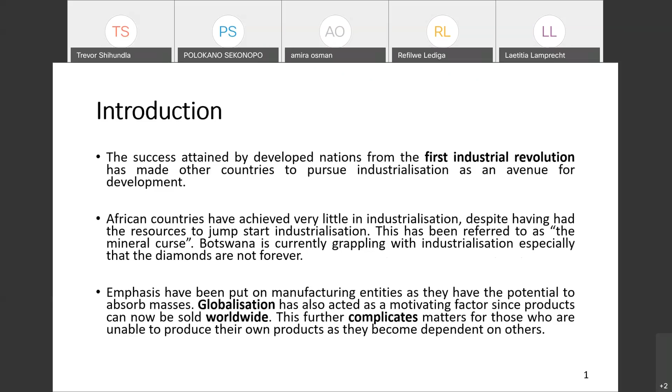Globalization has also acted as a motivating factor, since products produced in one country can be sold in another. Globalization also acts as a double-sided sword, since those countries which are unable to produce for themselves don't have much time to learn, as they tend to rely on products produced in other countries.

The literature that I reviewed has shown that around the whole world, countries are looking for ways of improving the livelihood of their citizens, and job creation is one of those ways.

This is based on the opinion by Holmes and others, who opine that prioritization of employment creation is informed by a prevalent assumption that employment has a positive impact on poverty reduction and stabilization.

This has led governments, in a bid to create entities which will create employment for their citizens, to devise means of empowering their SMEs with the hope that such assistance can help in the creation of jobs. Such assistance is in the form of grants, subsidies, mentoring, factory shells, and so many other interventions.

These interventions mostly target small, micro, and medium enterprises, our SMEs. This is because they contribute a lot to job creation and income generation. The downside is that though SMEs contribute a considerable number of jobs, they are characterized by a high failure rate. There are many advantages of focusing on SMEs because SMEs are the highest employers.

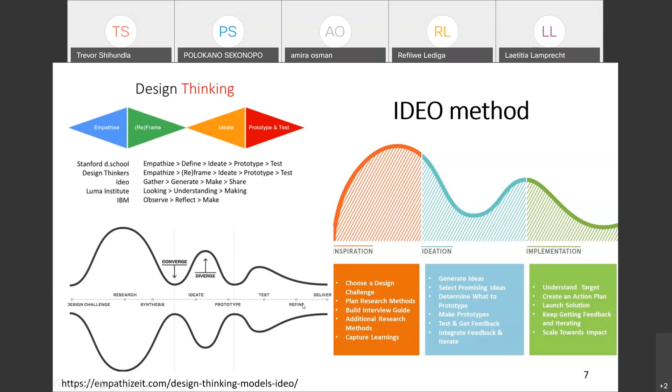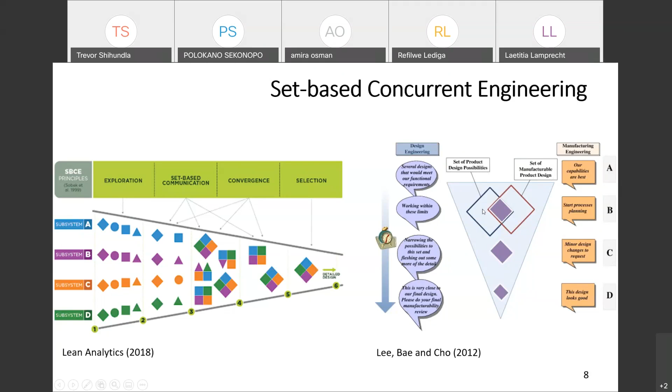The methodology adopted for this study was qualitative, involving the use of interviews, observations, and workshops, and a small percentage of quantitative method—a survey—was employed to identify entities to be taken up for the qualitative study.

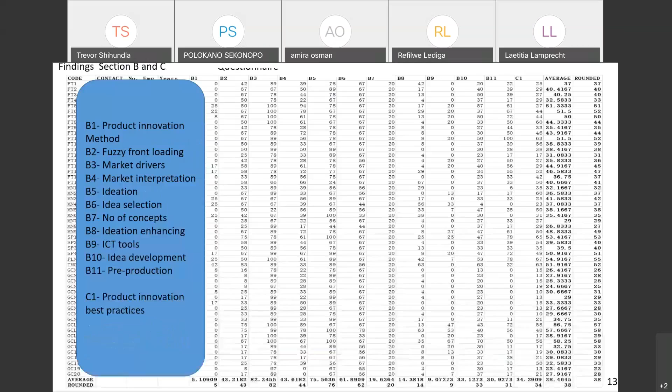Now, when you look at the years of operation, companies with less than 5 years number 32. Those which are 5 to 10 years are just 10. 11 to 15 years: 5. 16 and above: this is a really unpalatable situation, in that 1 to 4 years has been regarded as a very volatile time period for a startup company, because the company is not yet grounded in the intricacies of business. Here are the findings of Section B and Section C.

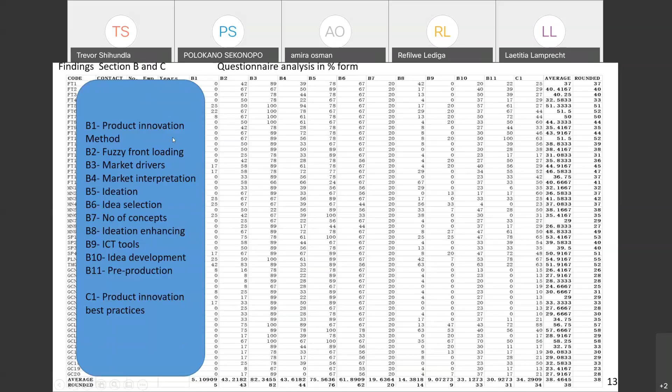Okay, this is the product innovation model. We just wanted to check the product innovation model Botswana SMEs are using. And the score, there's just so many zeros for these different companies, which means they don't have a product innovation model. Not having a product innovation model is like a team playing football without a system, which is very dangerous.

So from the interview findings, it just confirmed what the questionnaire found, and most participants did not have formal knowledge about product innovation. They had not got formal innovation certification.

At observation, I had wanted to use the so-called rapid plant assessment form, which is used by Japanese companies when they go around the world looking for companies to buy or take over. But when I tried to use it in Botswana, I found it could not be used because Botswana's product innovation scenario is completely far away from that, though we are trying to move towards it.

In conclusion, it has been found that Botswana SMEs are not providing enough jobs. Botswana's SMEs have got a high product innovation apathy, and there's a need for a product innovation model to be developed for Botswana. Also, the government of Botswana should devise programs to reach the general public concerning entrepreneurship and product innovation, because by doing so, consumers would want better products, thus making the SMEs come up with better products.

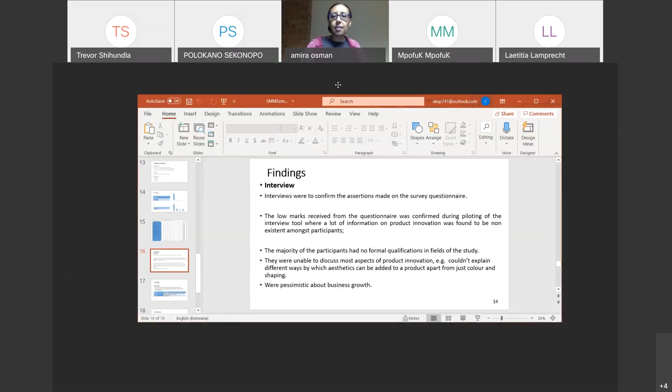Polokano, could you tell us a little bit more about this school program? I'm just fascinated by that. So your research is identifying problems with SMMEs, and there isn't enough product innovation, and you've identified that as the missing link with regards to development. I appreciate your comment about diamonds are not forever, and the fact that we need to develop new products. Is there an awareness about that? Is that why this program is taught in schools? Because I thought that's quite advanced. Could you perhaps comment on that before we move on to Laetitia?

Yeah, actually, it is taught in schools. The government decided to teach it in schools with the hope that the students, when they graduate from this program... it is called design and technology.

Okay, very interesting. But that, I mean, that in itself is a great advancement in terms of awareness of what the problems are. Do you agree with me? Yes, I do. Yeah, that's incredible. So thank you so much.

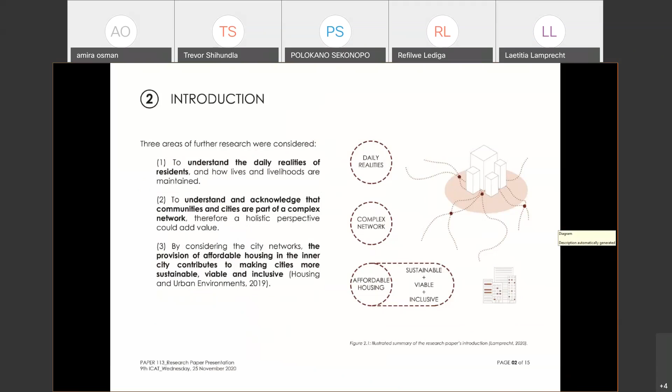So within this context, the word community refers to the community occupied building in the city of Johannesburg and the various interactions.

Laetitia, we're not hearing you anymore. Your voice is gone. Laetitia, we can't hear you at all. Can you hear us? You can type something in the chat. Trevor, do you have any idea what we can do? I'm just trying to text her to see if she will respond.

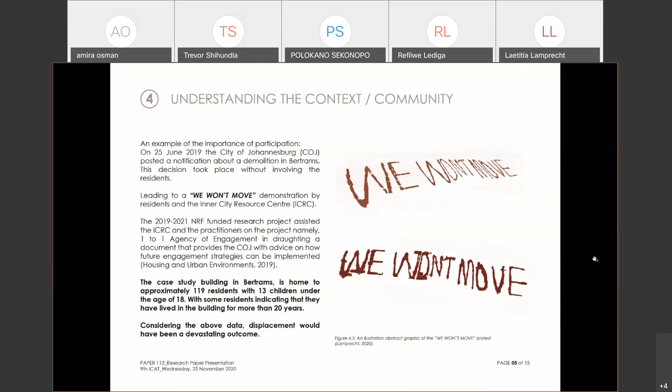If you consider that there are over 119 residents with 13 children under the age of 18, with some residents indicating that they have lived in the building for more than 20 years, this displacement would have been devastating.

Moving on to the action that was taken: the action plan was developed by TUT Architecture, CARINBE, and the UJ Community Engagement Team. This collaboration allowed engineers, contractors, and architects to come together and provide a list of what needs immediate attention within the building.

Firstly, the structural damage to the roof was identified. Secondly, design challenges needed for safety were identified. During this process of renovation, it was very noteworthy to see how solutions were found within the moment, and these types of solutions only take place when residents remain involved in the project and the process.

So the response was to repair the bricks, balcony, and also the steel staircase, allowing for general safety repairs. After that, a new screed layer was installed on the roof with a waterproof barrier. This now not only improved the structural safety, but also improved the living conditions.

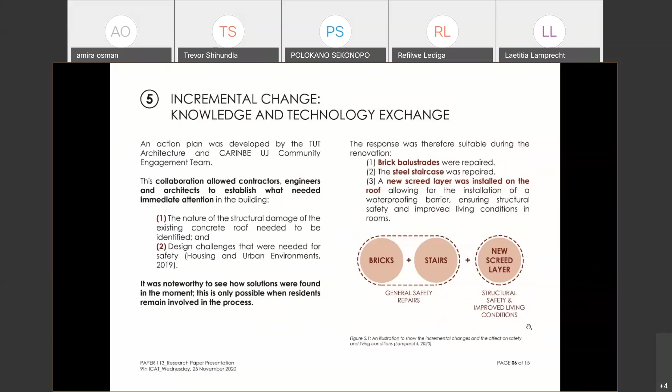So what does this tell us? The systemic change that needs to happen within architecture education — this is where the academic reflections help us. Understanding that architecture is not static is the first thing, and that radical shifts are required in the form of a response to dynamic societies in authentic ways.

We often think of radical shifts as being these grand ideas, however it's oftentimes small responses that make the greatest change. So asking a fundamental question which community engagement projects allow researchers to ask: how can architecture make a meaningful impact? By understanding and shifting the perspective towards the needs of the user and society, this idea of radical change does not seem daunting, but merely necessary.

So what is required? Balance is required to consider both human relationships that support community, with technical knowledge and advancing technology at the same time. However, this needs to be in balance in order to create these supports so that multifunctional cities can develop.

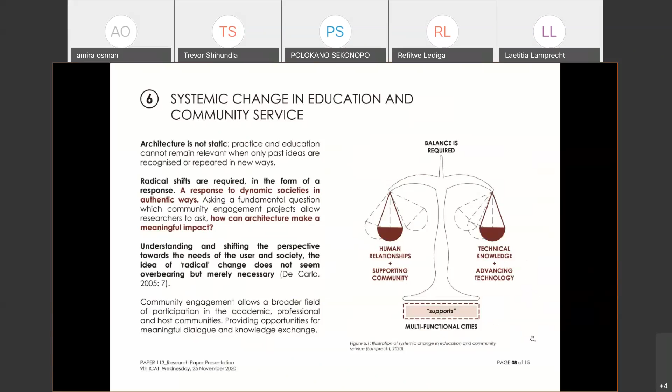So the implications of higher level policies and communities: firstly, architecture education and practice need to become responsive, and also local policies need to become more responsive.

By engaging with research institutions and being updated by changes in communities, policies could become more responsive. Cities need to be adapted for diversity, so participation not only becomes possible, but necessary. Considering the past displacement that occurred in Bertrams, it became clear that further disruption of place and livelihoods cannot be a solution. So to provide an example, policies that are interrelated yet accommodating.

The impact of the interventions, observing change: during the process of renovation, with the building's waterproofing, we asked this question - would this encourage you to start cleaning and fixing the spaces? We posed this to the residents, and many responded with the fact that they would start fixing and painting the rooms themselves.

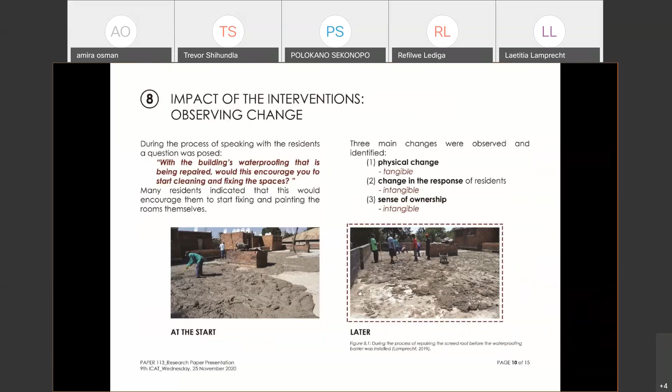This change indicates how architectural academia and practice can develop and remain relevant, but need to be open to change and accept social responsibility. All of these ideas need to come together, and that is the only way architecture will ultimately remain relevant.

So in Nabeel Hamdi's Small Change, Colin Ward references John Turner's first law of housing, which is specifically relevant here too. I'll just read the quote: when dwellers control the major decisions and are free to make their own contribution to the design, construction, or management of their housing, both the process and the environment produced stimulate individual and social well-being.

In conclusion, through the various workshops, meetings, and skills training that took place, these were all based on the needs of the host community. The project ultimately successfully brought together stakeholders and participants. Realizing the academic benefits, the research also ensured inclusivity in design making and implementation. Secondly, this is in some respects an alternative approach towards housing provision, retaining existing communities and minimizing displacement.

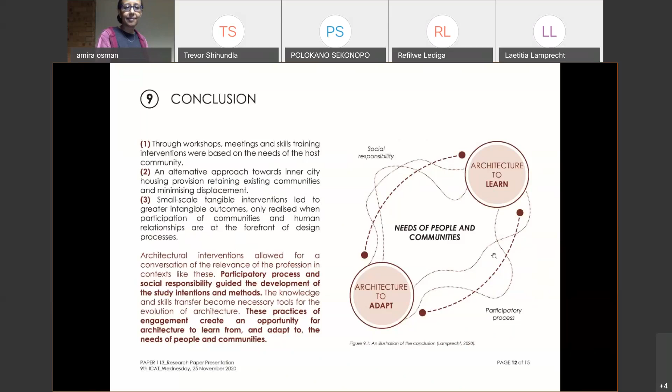I would like to ask my co-author, Professor Amira Osman, if she would like to add any of her own thoughts and reflections.

Thank you so much, Laetitia. I was about to interrupt you, but I gave you an extra minute, so that is very fine.

I want to consult here with, before I make comment on this, I want to consult with Refilwe, and I see that Dr. Mahachi has joined us as well. Is it okay if I switch the program a bit, Refilwe and Dr. Mahachi? It's just that we have another paper that's strongly linked to this one, so I thought it might make sense to present that paper immediately after this one, and then come to your presentation after that. But I'll only do that if it's acceptable to you. Dr. Mahachi, could we hear your comment on that, please?

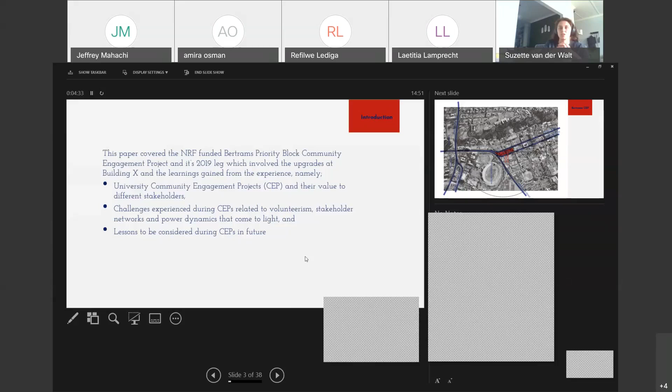So firstly, and I don't have to do too much context here, Bertrams is located east of Johannesburg CBD. It's located just east of Ellis Park.

Bertrams was developed in the 1930s as middle income housing for working communities associated with the mining industry in Johannesburg. Over the years it's undergone a series of transformations, and it was actually considered one of the first suburban areas that was an integrated community in the late 80s, around the time Hillbrow was also becoming quite cosmopolitan, before the abolishment of the Group Areas Act. Because it's on the periphery of the city, it has remained out of the spotlight, so things happen there without anybody knowing.

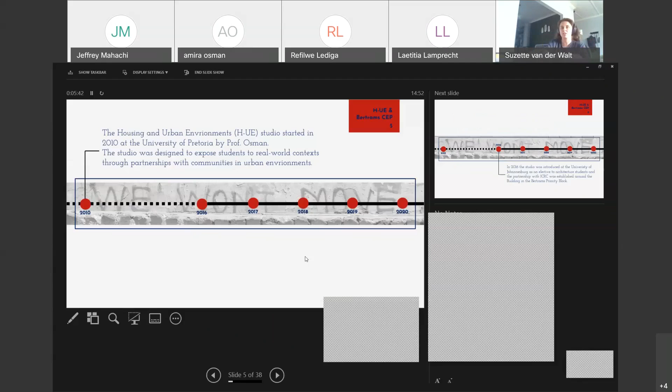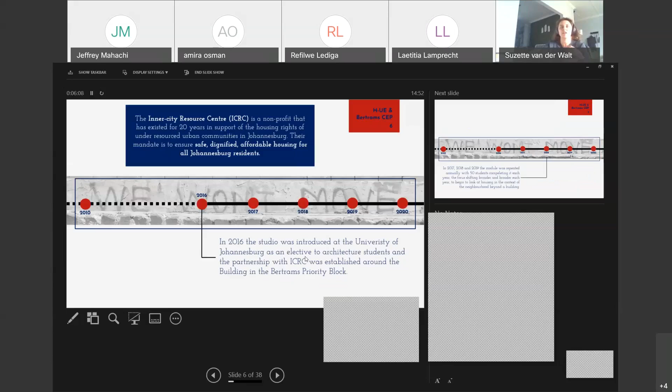Just an introduction to the project: the Housing and Urban Environment Studio started in 2010 at the University of Pretoria by Prof. Osman, and it's been through a series of iterations, resident at a number of universities. In 2016 it was moved to the University of Johannesburg, where it became an elective for architecture students. The elective was hoping to look at urban environments, and that's why they reached out to the Inner City Resource Centre, a non-profit operating in Johannesburg for 20 years that represents the needs of under-resourced urban communities in their plight for safe, dignified, and affordable housing. From 2017 to 2019, the studio was run every year at UJ with up to 50 students completing it, and every year the focus became broader, going from housing on a building scale to a city or neighborhood scale.

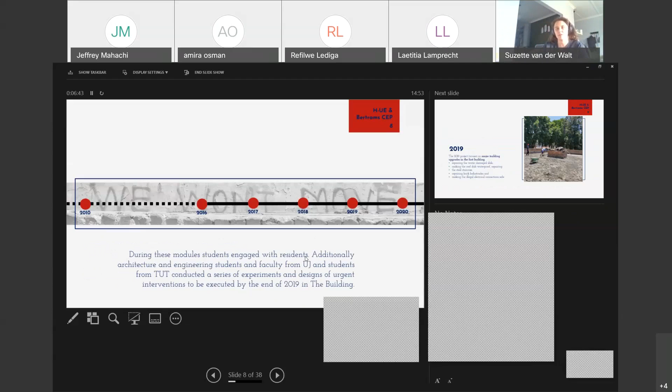During these modules, students engaged with residents to develop ideas and analyze the big challenges, and we looked at one building in particular. In 2019, when I joined the project, my role was to implement upgrades based on the recommendations the students had made. These major upgrades included repairing the slab, making it waterproof, fixing the steel staircase, repairing brick balustrades, and fixing the illegal electrical connections, which Laetitia has already shared with you.

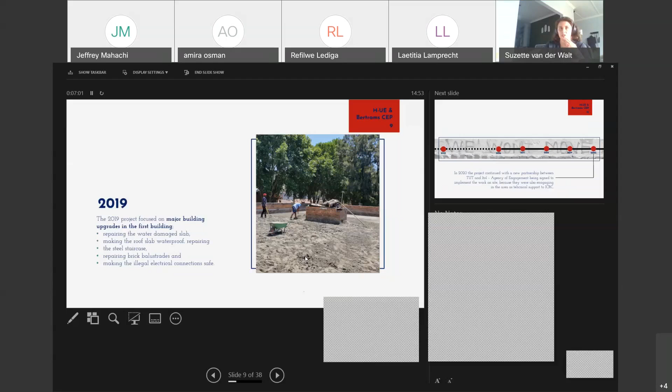Now we're in 2020 and the project is ongoing until 2021. This year we've formalized the agreement between 1to1 and the organization I represent, and we're taking these upgrades further. In 2020, the project has started looking at the neighborhood and specifically hopes to address COVID-19 exacerbated issues, looking at spatial interventions at the neighborhood scale with a series of workshops with representatives from the community.

The advantage of community engagement projects at universities is exposure to a real world context, which is invaluable for students. It also fosters a sense of sensitivity towards other environments. Students often occupy a position of privilege and move through cities every day without knowing what happens in those cities; by doing this, they start opening their eyes to what is happening in the rest of the world. Additionally, these community engagement projects allow us to channel resources that, as learning resources, would typically never leave the campus - we're bringing those into the city where they can contribute more. The last benefit is that it allows academics, lecturers and researchers, to remain present in their profession, something they often lose track of.

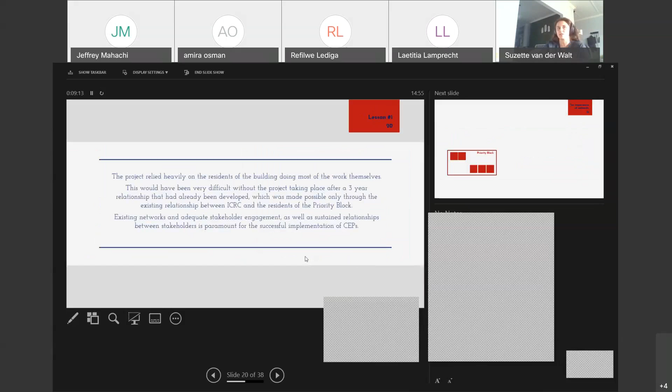We relied very heavily on resident engagement, and this is problematic as an outsider entering these spaces, so it was important to understand the relationships between people and things. The priority block is constantly challenging the City of Joburg for safe and inclusive housing, and they do this through their mobilization by ICRC. ICRC was then contacted by the Housing and Urban Environment Studio, which hoped to get learning in exchange for resources. These resources came through the National Research Foundation, and 1to1 became the implementing agent. But essentially, this relationship between ICRC and the priority block was critical.

So the role of this relationship was invaluable, and it allowed us to really get buy-in from the residents. It was important to use ICRC as a channel to introduce new team members, to establish those relationships of trust. It was also important to understand the social dynamics within the building and to prioritize tasks that promoted those relationships and encouraged user participation in as many events as possible, to ensure that buy-in remained and good relationships were maintained for future tasks that might not involve so many residents.

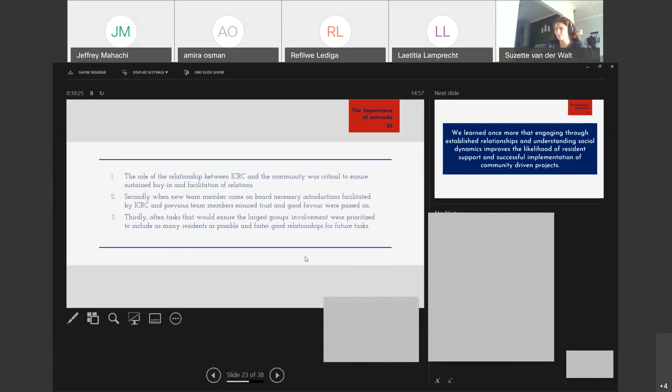So we learned that engaging through these established relationships and understanding the social dynamics improved the likelihood of resident support. This sounds quite obvious, but you only learn this lesson by making this mistake, really.

So self-help is the mandate of ICRC and a number of grassroots organizations, and a number of residents of the priority block are unemployed. It therefore seemed quite obvious to us that we should use a skills training initiative to put the residents to work in repairing their own building.

We believed that to maximize the resources, we would offer an honorarium to the volunteers to thank them for their time and participation. We thought it only fair. However, this brought about tremendous challenges and learnings and some conflict along the way. As soon as you start issuing payment for something, then you're setting up a different set of priorities and values.

Additionally, the idea of skills training is a very politicized idea, and we often see it as a tool for economic redress. However, the idea that I, as an architect or as an academic, have anything to teach somebody who probably has been doing the work I'm trying to make them do for much longer than I have been on the planet, is quite an arrogant thing to do.

So from the experience of being on the ground, it actually brought us to question whether people are not employed because they don't necessarily possess the skills, but because they don't have access to the opportunities to put their skills to use.

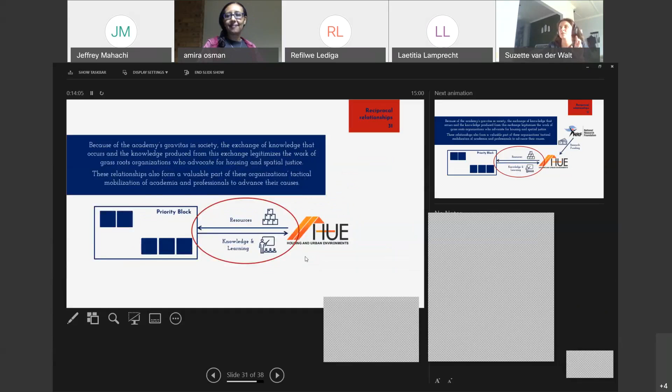Okay, I'm on it. So this relationship and this exchange is incredibly valuable because we can channel these resources to where they are most wanted. These are just some key takeaways that are in the paper, and you can go through them. But I think the major experience is that learning from the real world is incredibly important, though we must understand these are real people and real environments, and we must be incredibly careful.

So then just quickly, updates on the project: it has since seen us get new researchers as part of the team, which has been quite great. And our project now focuses on water and sanitation in the area.

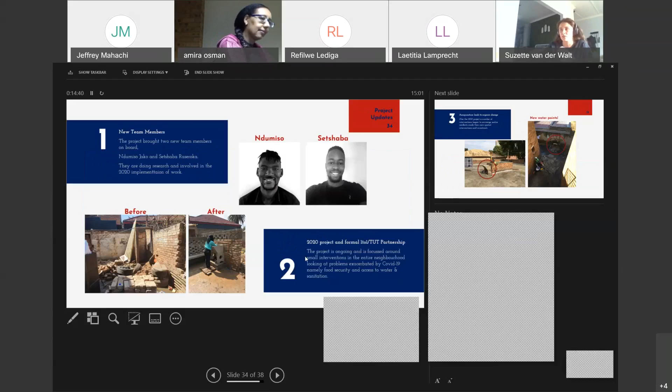So we've been working in some neighboring buildings. We actually built some toilets for one of the buildings that had no access to toilets previously. And then there were these natural developments that occurred in the building where residents had started, after we had repaired the roof and had started doing other things, they started addressing their own needs, particularly in terms of water and access to water.

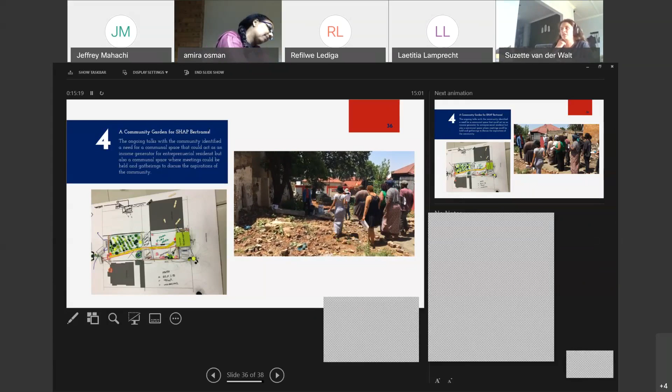And then lastly, the current project we're busy with is looking at the neighborhood, because we established a need for a community space where community issues could be addressed. This is us having designed this park with the residents and then presenting the park as feedback. So the task team is sharing what they had designed by physically mapping out the design in the space, and the rest of the community then seeing what's coming. And we've actually started implementing that now.

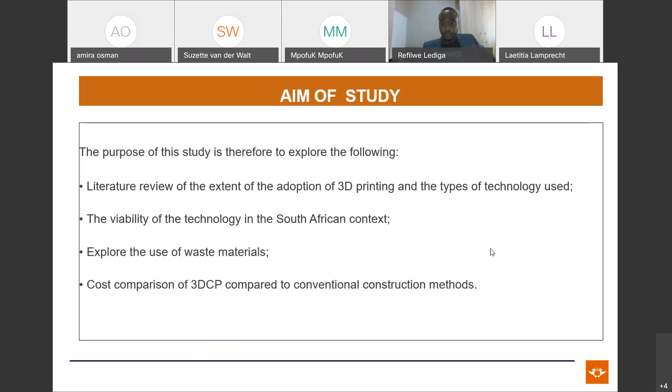Although 3D concrete printing is a relatively young technology, there's substantial research that has been done throughout the world. There are two fundamental factors to take into account to make it successful: one important factor is the 3D concrete printing machine, and the other is the material design. There are also other design approaches to 3D concrete printing. The commonly used machine designs are what we call a gantry-based system and a robotic arm system, which I'll show in the following slides.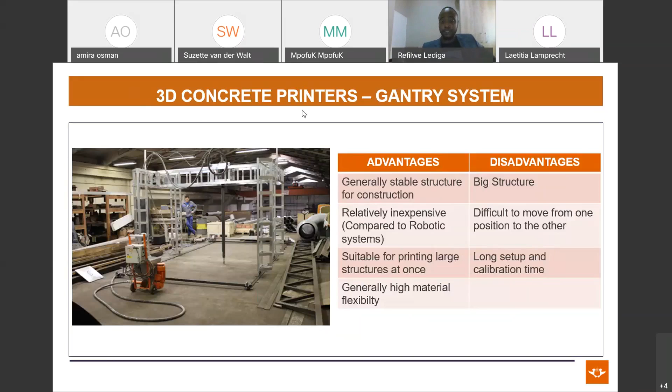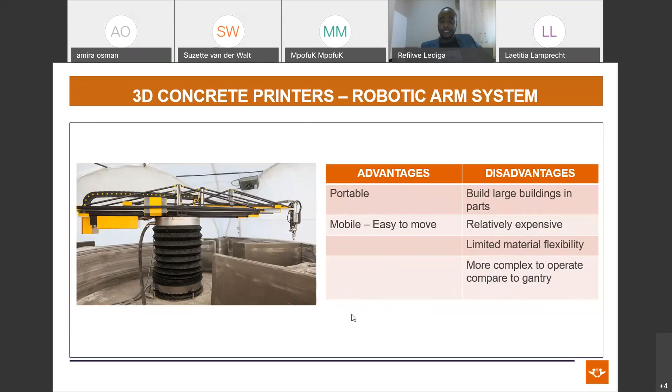Then the next printer I spoke about is the robotic arm system. Its advantage, compared to the gantry system, is that it's a very portable, mobile system. However, the disadvantage is that when building a huge structure, you'd have to build in pieces, similar to Lego pieces. It's relatively expensive, has limited material flexibility with a lot of manufacturers, and is more complex to operate compared to the gantry system.

With regards to the recipe, or the concrete material mix design, what I have on the screen is the fundamental mix design that's used in industry. However, there are various mix designs out there, but they always bear reference to this fundamental mix.

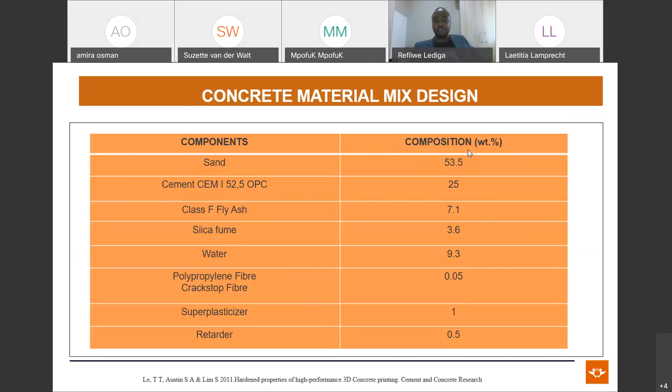We also explored recycled materials in this project. We looked at copper tailings, which showed high mechanical properties in our mix design, good buildability, and are generally abundant in industry. We also looked at recycled glass, which gave us good workability, however lower mechanical properties compared to sand in our material mix. We are still investigating the impact of construction waste and oil sludge.

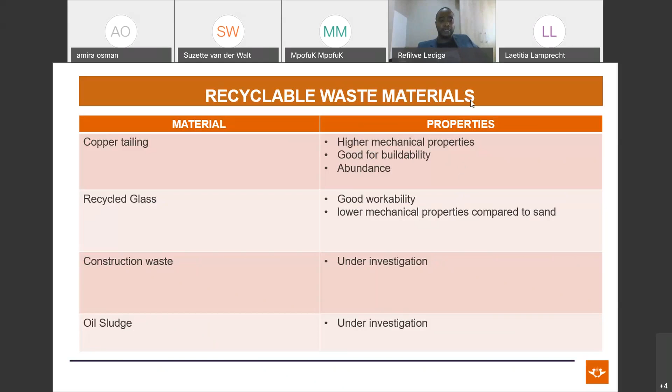In the experimental program and method, the first phase focused on the availability of 3D concrete printers and their categories. The second phase looked at the cost of these printers. The third looked at the materials approach. The fourth compared the labor cost. And finally, we compared all the technologies in one slide.

To do a cost comparison, we had to pick a house. So we chose a typical RDP house, or something that looked like one, with a 40 square meter floor area, 1 bedroom, a bathroom, a living area, a kitchenette, a wall height of 2.4 meters, wall area of 92 square meters, and a wall volume of 12 cubic meters. This is similar to a standard RDP house.

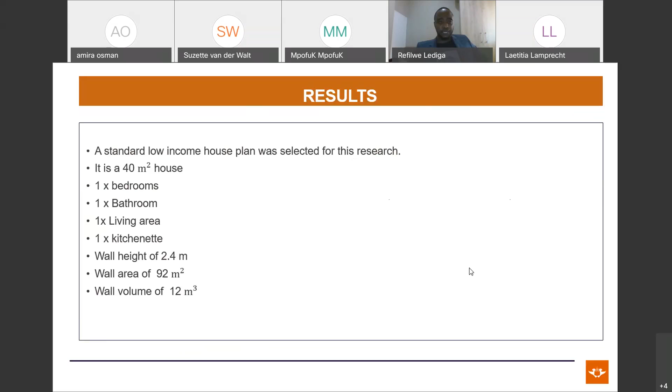After our research, we came to these conclusions, and this is the overall summary of the results that I'll be presenting here today.

With regards to materials, the robotic arm system and the gantry-based system use less material compared to brick and mortar. The reason is the flexibility with regards to printing pattern when using these technologies, which manages to avoid wastage, which we've seen as a big advantage.

With regards to delivery time, between brick and mortar and the robotic arm system, there isn't much difference, but we've seen a lower delivery time with the gantry system.

Now, with the material cost: for brick and mortar, we got 140 rand per square meter. For the robotic arm system, we got 906, which is significantly higher, because robotic arm systems normally use proprietary material. For the gantry system, we got 108 per square meter, because with the gantry system we're able to use the mix similar to the one I referenced when I started my presentation.

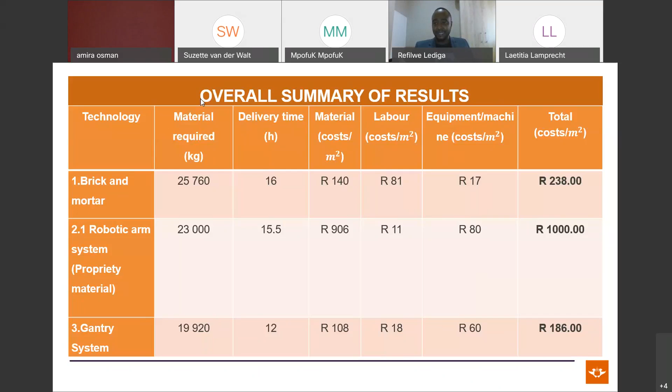Overall, brick and mortar cost 238 rand per square meter, the robotic arm system cost 1,000 rand per square meter mainly due to expensive material, and the gantry system cost 186 rand per square meter, which is not too far off from the brick and mortar system.

So in conclusion, you are concluding, so that's fine. Please proceed, I think I have 9 minutes. I'm on 9 minutes now. So maybe I documented it inaccurately. I thought you were over time.

Please proceed. Okay, so yes, many companies have taken on 3D printing, and it's a growing industry. From the results we show, the cost of machines plays a significant role in the total cost at the end, and they assume that 3D concrete printing is really a viable option.

In my last slide, a viable and competitive approach could be to have the option to hire a 3D concrete printer machine for this technology to be feasible in the construction industry. An investigation into 3D concrete printing pre-packaged mix design could be very impactful. The lifespan of these machines should also be investigated as to durability. Developing standards for 3D concrete printing will really be helpful. And we've also observed that a multidisciplinary approach is quite important to deploy this technology.

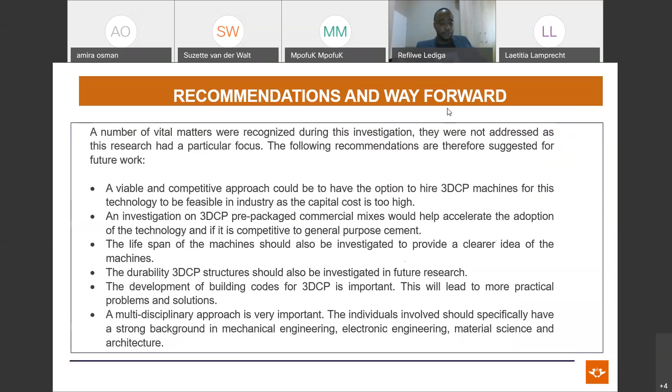I don't know if you can hear me. I can't unmute myself, Trevor. Why can't I unmute myself? Trevor, can you hear me? I can hear you, Prof. Your mic is on. But it says muted, so...

Refilwe, can you hear me? Yes, I can hear you. Oh, it's so weird because on my screen it says it's muted, but anyway, sorry for that. And you were right, my notes are so messy, I need to work better on my notes. So I had the time wrong. You were exactly at 12 minutes, and I really appreciate that. Thank you for presenting your very interesting research.

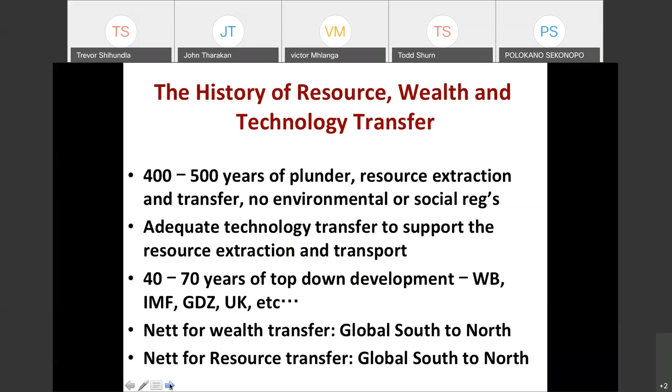It's been a net wealth transfer from the global south to the north, and the net transfer of resources has as well been from the global south to the north, which is why we have such vast, huge, rich cities all over Europe and North America. But when we travel elsewhere, what are the failures here?

The tech transfer has been top down. There's been insufficient investment in human capital development, no investment in community capacity building, and really very little operation and maintenance training. These are the kinds of top-down development interventions that have resulted in just failures.

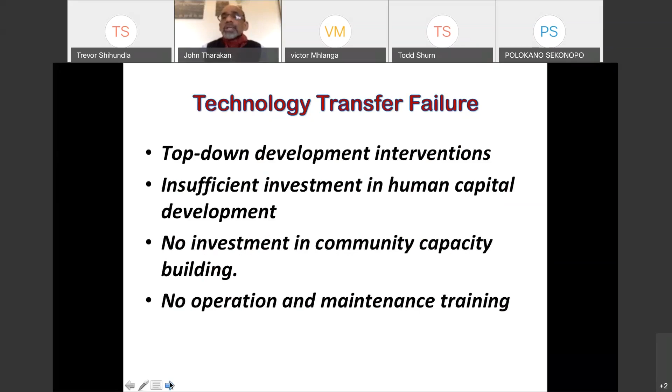So we have, for instance, if you do the research, there have been over 1 million hand pumps installed in the global south. More than 60% of those are not working right now. Why? Because they were not really supported.

See, the development paradigm that has been followed for so long is actually quite inappropriate. It marginalizes and devalues indigenous knowledge systems. It's really a development divide that results in underdevelopment.

We need to develop a knowledge culture. We need to be able to talk about adaptive knowledge enterprises, and we need to imbue the students of these African universities with a commitment to serve society. We have to be focused on ways of generating new knowledge, but that generation of new knowledge has to be tightly integrated with social innovation, social entrepreneurship, and very much based within the community.

What we see in the Songhai Leadership Academy is a much better model for technology transfer. It's a model that ensures human capital development, a model that facilitates and supports community capacity building, and basically it's focused on developing African human capacity, capital, both in terms of capacity and capability, as well as in terms of creating, producing, and disseminating the appropriate knowledge that will result in significant and substantial empowerment for the communities.

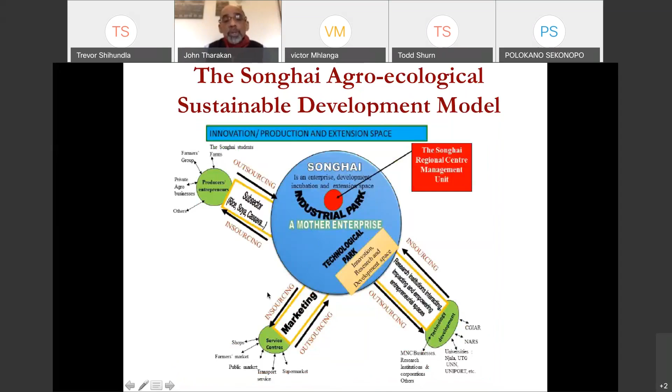And if you look at the development model, it is highly located within the community and focused on basically developing the local community around it. So that I will end my talk and open the floor for any questions.

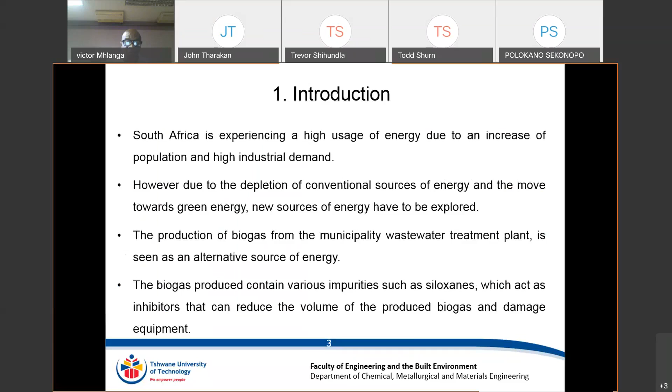Biogas production contains various impurities such as siloxane, which act as inhibitors that can reduce the volume of biogas production and damage equipment. Siloxanes are made out of silicon compounds. They are physically and chemically inert, however resistant to oxidation, high temperatures, have low surface tension, compressibility, and are water repellent. During combustion of biogas, siloxanes are converted into crystalline silica, which has similar chemical and physical properties.

What usually happens is that the biogas is used to generate energy, where you use generators that convert your biogas into electricity. During that process, the siloxanes, as they are highly volatile, as they evaporate, tend to clog the equipment and make it difficult for the equipment to operate efficiently, resulting in high maintenance and downtime. Figure 1.1 shows the impact that siloxane has on the turbines. As you can see from the left, the other side is clogged by the siloxane. A similar thing happens also with the boiler.

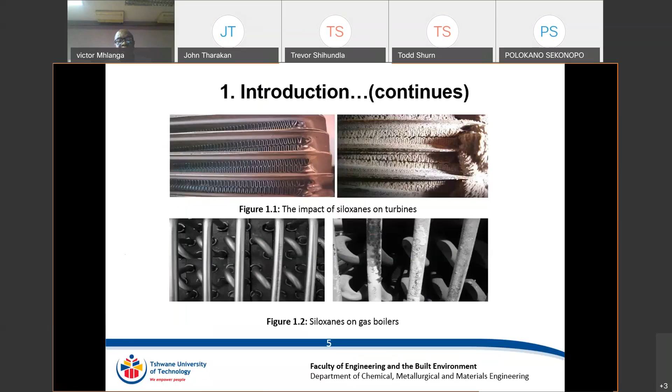The siloxane tends to clog your boiler, hence the lifespan of your equipment is reduced, and downtime and expenses come with it. The overall objective of this study was the utilization of an anaerobic treatment process for the reduction of siloxane compounds present in municipal wastewater sludge in a fixed bed reactor.

The specific objective of the study was as follows: to quantify and analyze siloxane degradation in municipal wastewater using anaerobic treatment, and optimization of a fixed bed digester.

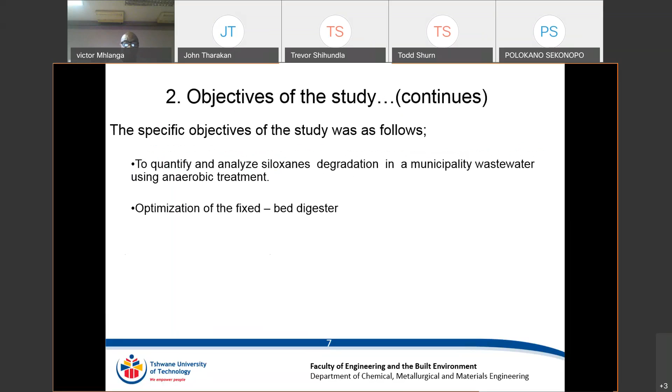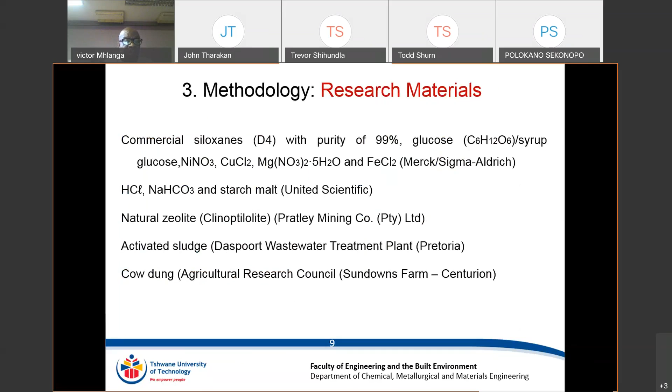These are the materials I used for my study: commercial siloxane, glucose, HCl, natural zeolite, activated sludge, and cow dung.

2,000 mils of activated sludge was mixed with 200 mils of cow dung and 300 mils of water. Nutrients were also added to the feed solution to maintain microorganism growth and biogas production: 150 mils of glucose syrup, 20 mils of cupric chloride, 20 mils of nickel nitrate, and 20 mils of magnesium nitrate were added as supporting nutrients and minerals in our digester.

This helped to keep the microorganisms within the digester active, and also helped reduce and produce the biogas.

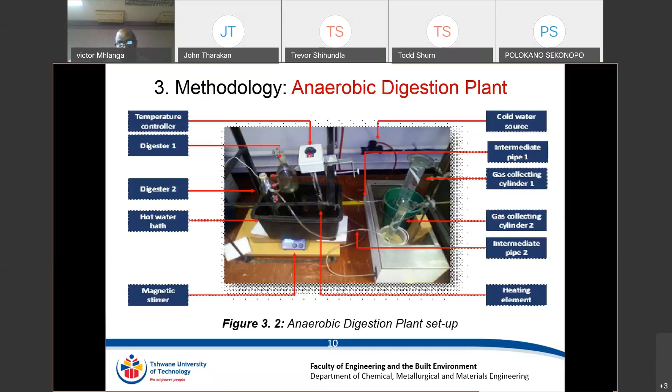We also had temperature control and pH control within our plant. Method of analysis: a 5 mil sample from the digester is removed and taken into the centrifuge at 4,000 rounds per minute for 20 minutes.

After that, the sample is filtered, and from the filtered sample, 1 mil is removed and diluted with 50 mils of deionized water. From there, we take 2.5 mils of the diluted solution and mix it with digestion solution and sulfuric acid, and put it in a thermo digester for 20 minutes at a temperature of 150 degrees Celsius.

After that, the vials are removed from the digester and kept at room temperature. When it's cool, we take it through the UV spectrophotometer, where our COD is analyzed.

The purpose of analyzing the COD is to see that there is activity happening inside the digester from microorganisms. At higher CODs, we experience a problem where there will be no production of biogas.

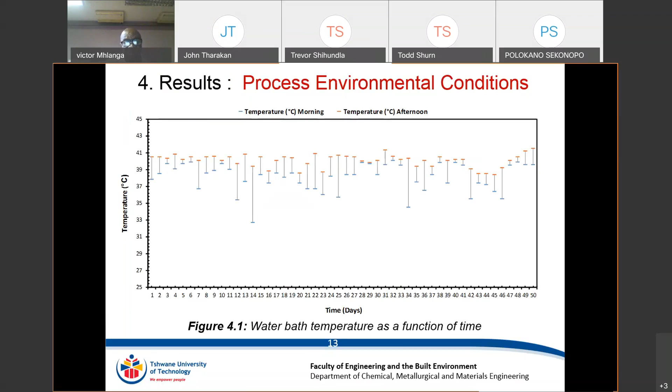The pH, as I've mentioned in figure 4.2, where we talk about pH acclimatization: we have the controlled pH of digester A and the uncontrolled pH. We wanted to see what would happen if we didn't control the pH with hydrochloric acid or sodium bicarbonate—would the pH remain constant? As shown, the uncontrolled pH fluctuated, even dropping below around 5.5.

With the controlled pH, we managed to maintain the pH within the range that favors methane production, which is from 7.3 to 8.

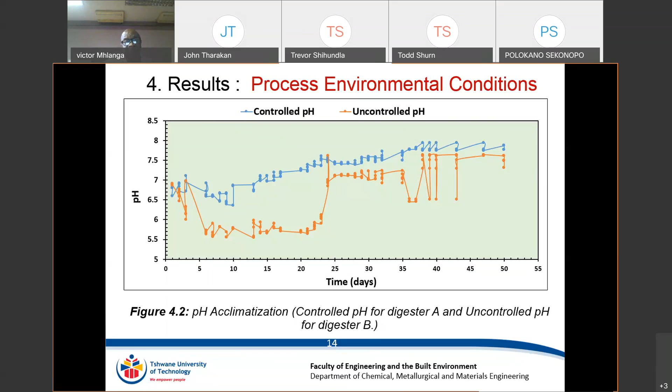If we have a pH that is below 6.6, then the process of methanogens that produce methane ceases to exist, and we have an acidogen process where acids take over because of the fatty acids developing there. This makes it difficult for methane to be produced.

Figure 4.4 shows the effect of COD on the accumulation of biogas. We can see from A that with the COD being controlled, we managed to produce around 4,000 mils of biogas, and with the uncontrolled one, we managed to have about 1,200 mils of biogas.

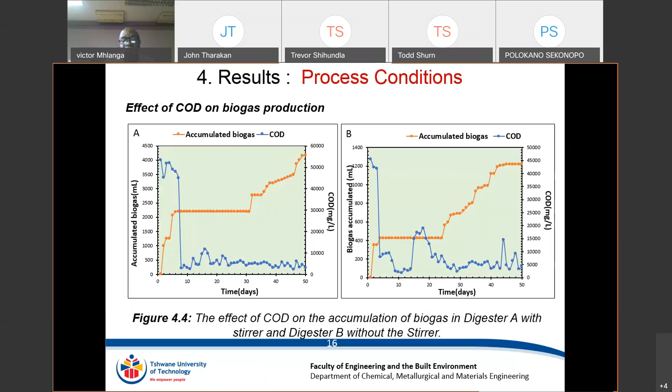Figure 4.5 deals with siloxane degradation using a zeolite bed in an anaerobic digesting process. The digesters are filled with zeolite at different bed heights - 2 centimeter, 4 centimeter, 6 centimeter, and 8 centimeter bed heights - trying to determine at which bed we can have an optimal reduction of our siloxane.

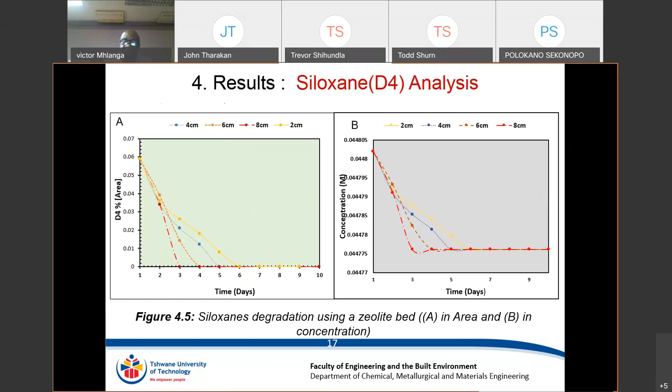By the look of the graph, we can see that within 3 days, the 8 centimeter bed height caused the siloxane to be reduced from 0.0448 to 0.04775, and with the smaller bed height of 2 centimeters, we can see that it took longer for the siloxane to degrade to that value.

In conclusion, the investigation of temperature and pH shows that the two parameters have an effect on the pH parameters, and have an effect on microorganisms in the digester and the production of biogas. The carbon dioxide is affected, the COD is affected by pH, and the COD has an effect on the production of biogas. The degradation of siloxane is influenced by the zeolite bed height - the greater the bed height, the more effective the degradation.

Thank you, Mr. Mhlanga. Thank you very much. Yes, presentation. I think we have some time for questions, Mr. Trevor. Yes, we might have 2 questions because it's actually gone a bit over time. Okay, so is there any brief questions for Victor?

I did have a question for you about, you said that this is a novel method of removing siloxanes. What was the prior method, and what were some of the problems with that prior method?

I think the method used prior, which is expensive, was scrubbers. That is very, very expensive. So I tried to see that by using zeolite as my bed, I would be able to remove most of the ammonium, which is the strong inhibitor in terms of gas production, allowing the microorganisms to be able to degrade the siloxanes.

And in terms of scaling this, because obviously this has been done in a lab, how can you scale this if you actually wanted to put it into a wastewater treatment plant?

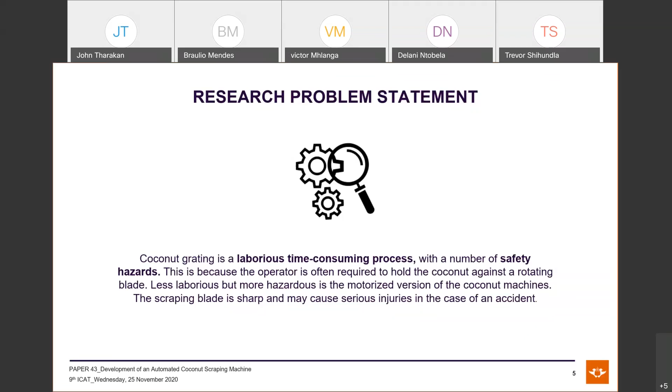For the research problem statement, coconut grating is a laborious, time-consuming process with a number of safety hazards. This is because the operator is often required to hold the coconut against a rotating blade. Less laborious but more hazardous is the motorized version of the coconut machine. The scraping blade is sharp and may cause serious injuries in case of an accident.

Our research objective is basically to produce an automated coconut scraping machine that is less laborious than existing technologies, designed to be fail-safe and prevent the operator from reaching the rotating blades during operation, with simplicity in construction and functionality, easy to set up and operate.

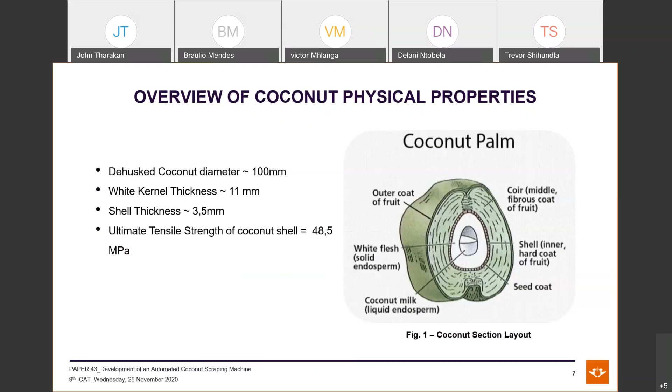Let's have a quick look at the overview of the coconut physical properties. There is an outer coat and a middle coat, and those two coats need to be removed, and the coconut split in half in order to be scraped. Roughly the coconut shell has a diameter of 100 millimeters, and the white kernel, the edible portion, is 11 millimeters. The shell thickness is 3.5 millimeters, and the coconut shell has an ultimate tensile strength of 48.5, which is respectable, comparable to some engineering plastics.

For an automated version of the coconut scraper, we have Rubio Junior's design. What I like about this machine is its safety features—it creates complete separation between the operator and the machine, although the operator is still required to hold the handle and adjust the coconut relative to the rotating blades.

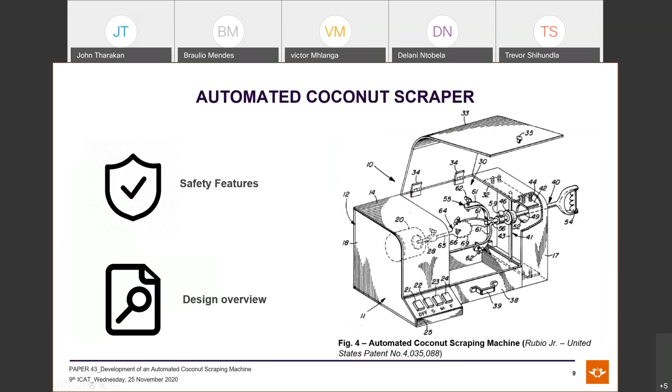We'll move on to the methodology. The methodology used was research analysis, concept creation, detailed design, and then design analysis. For the research analysis, we looked at the physical properties of the coconut to help in the design, and did a review of coconut processing machines outside of scraping in order to bring the coconut to a state that can be scraped.

We also reviewed coconut scraping machines to look at the different components and how they are usually set up, and also reviewed the safety features in those machines.

For the concept creation, we used SolidWorks as our CAD software. The design requirements were that it be capable of movement in all three axes to remove the need for the operator to adjust the coconut, a clamp to firmly hold the coconut, and a control platform to automate the process—eliminating the use of an operator so the machine can be fully autonomous.

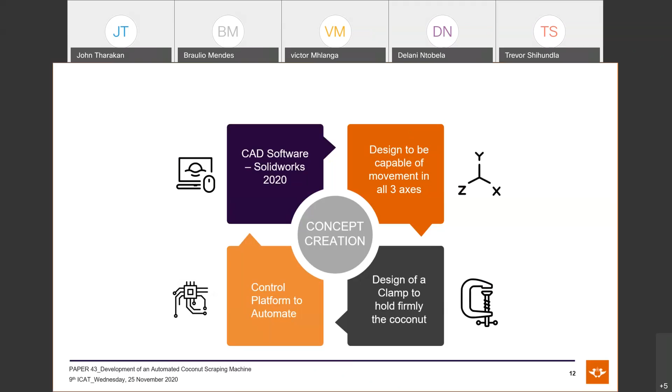For the detailed design, we'll look further into manufacturing, acquirable manufacturing processes out there for our components, as well as off-the-shelf components that will be part of the design. We'll consider also standards, and material selection, like for instance, the coconut is edible, so the materials in contact with the coconut need to be food grade materials, as well as operation and safety considerations.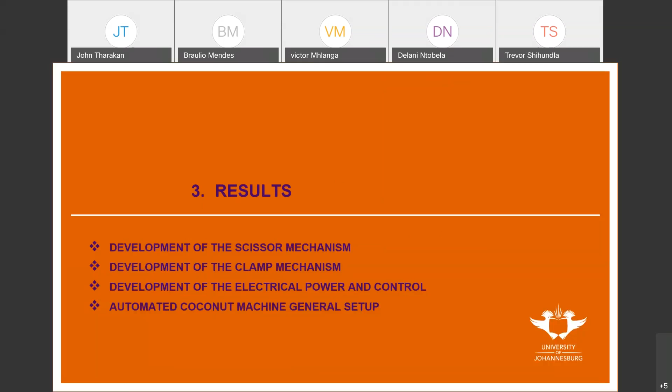Looking at the development of the scissor mechanism, we've managed to come up with a design capable of adjusting the blades to a maximum angle of 33 degrees. How does it do that? It does that by using an AC motor that transfers power via a pulley and belt system to the blades.

This keeps the blades in constant rotation, and also uses a stepper motor to linearly push the linkage system, which I'll show later on in more detail, such that the angle can open and close while the blades are in rotation.

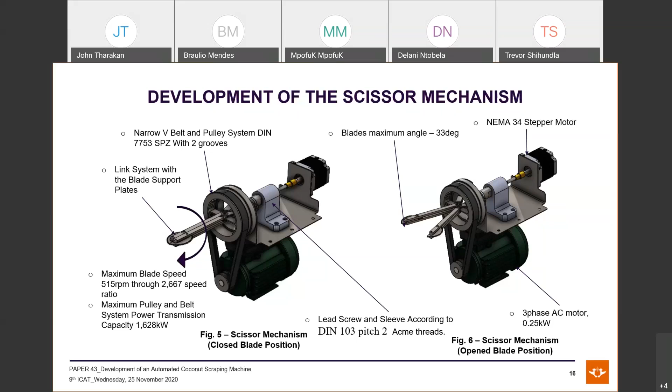Looking here into more details, on the left we have the driven pulley assembly, which is not just a pulley, it's also a bearing housing holding a deep groove ball bearing for smooth rotation. The lead screw and sleeve system is assembled to a radial type bushing, whereby the linkage system can freely rotate around this bushing, creating a separation between the two systems, so as to maintain the blades in rotation while being able to adjust the range of the blades.

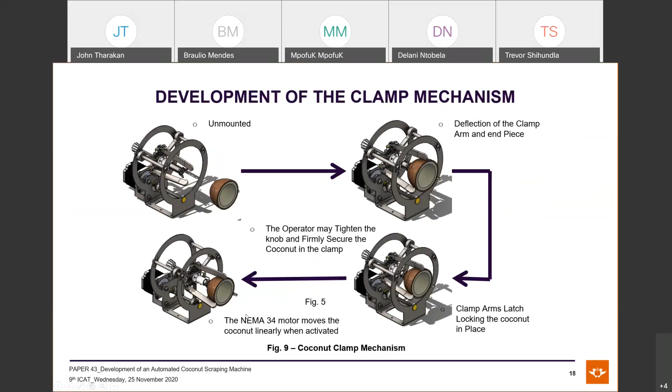We also incorporated the lead screw and sleeve system into this, such that the coconut can be pushed linearly in the direction seen in the illustration.

In more detail, I want to show the development of the same clamp mechanism. As you can see here, we have the compression spring on the end piece, and the torsion spring on the clamp arms. Once you push in the coconut, the arms deflect upwards, and once far enough in, it latches in place. The operator can then tighten this rod at the back, such that the spring reaches its solid length.

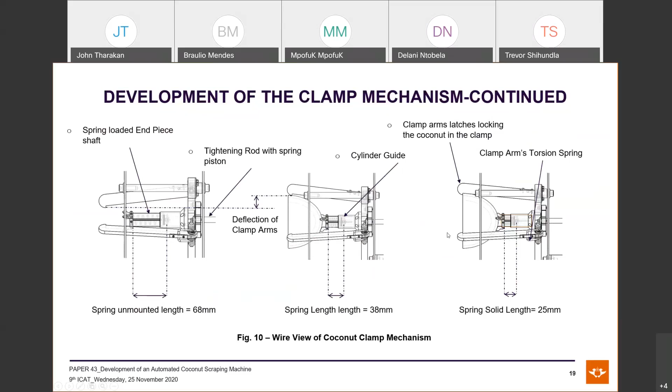This is estimated to take less than 50 seconds to mount the coconut in place.

Basically, the control circuit will control the three motors, two stepper motors and one AC motor. There is also a current sensor that will sense the current changes due to the restriction on the rotating blade during scraping.

As the scraping takes place, there will be changes in the AC motor's current, increasing or decreasing depending on the kernel's range. Those current changes are sensed by the current sensor and sent back to the Arduino, the control circuit, which then knows how to adjust both mechanisms to work with each other.

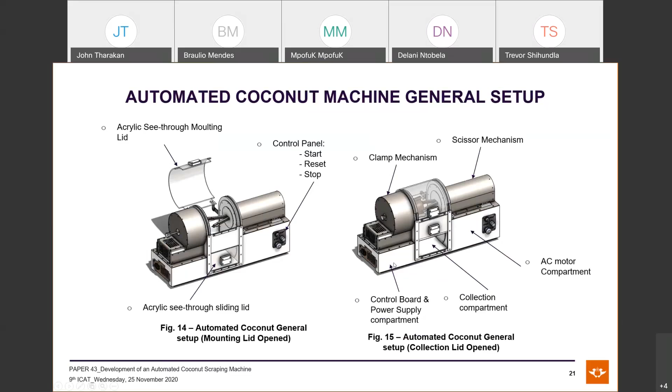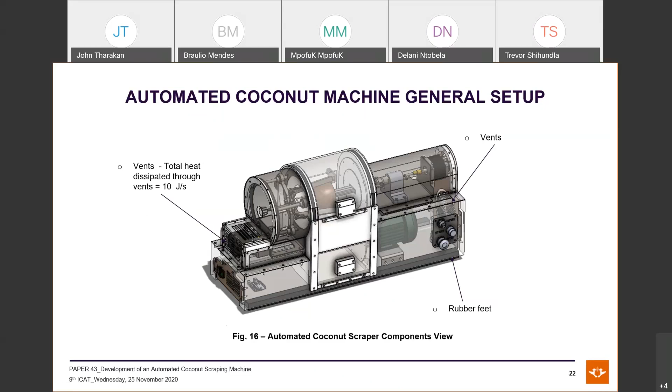Some specifications of the components we're using: an AC motor with a power rating of 0.25 kilowatts, a stepper motor with relatively less power consumption, an Arduino with very little power consumption, and a power supply that pushes 0.115 kilowatts, with those efficiencies.

The efficiency for the AC motor is 61%. The rest, the 39%, will basically be converted into heat, which needs to be adequately dissipated by the vents. The approximated machine weight will be 50 kilograms.

The overall dimensions will be 1007 millimeters by 497 millimeters by 403 millimeters. The machine input voltage will be the normal 230 volts at 50 hertz.

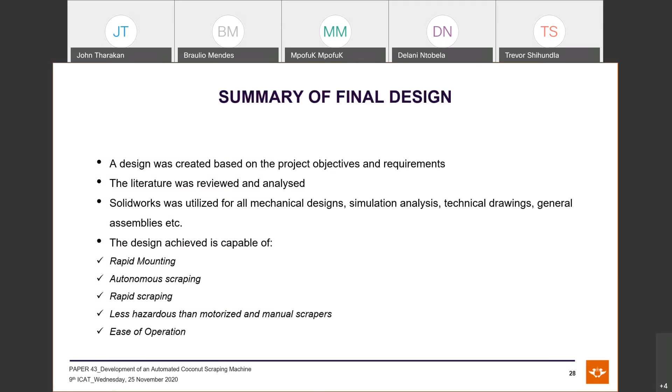My recommendations: a detailed design of the electrical power and control system is recommended to be produced by a competent electrical engineer. Use of forced convection by incorporating fans to properly dissipate the heat.

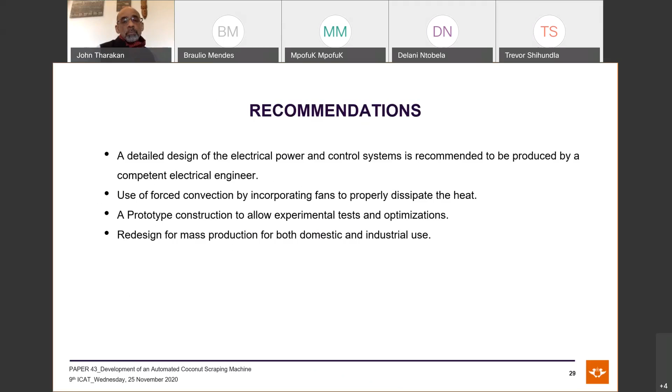A prototype construction to allow experimental tests and optimizations. A redesign for mass production for both domestic and industrial use. Thank you.

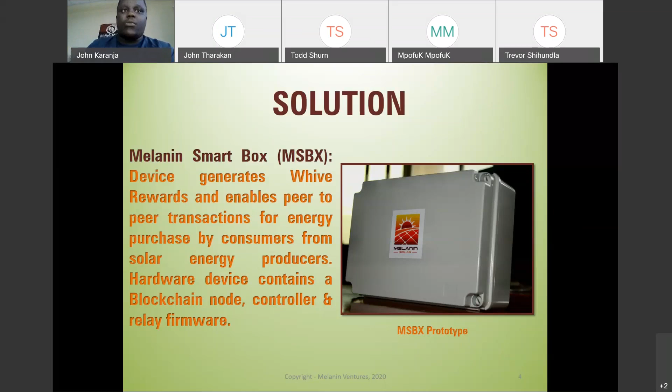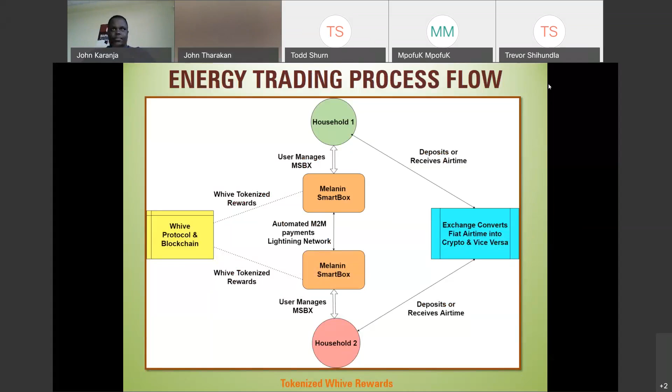Thank you very much, John, and Todd as well. Thank you for your presentation and your engagement. I have to admit, in all honesty, blockchain and the ideas of blockchain go completely over my head, so I don't understand what blockchain is at all and how it actually has value. Chemical engineer, I don't have the sort of the smarts. Let me just say, I'm not smart enough to understand blockchain, but I do know that it brings a lot of value to transactions. So perhaps you could speak to how this will directly address one of the things that Zamujo talks about, which is empowering a community. How does it empower people on the ground having this technology?